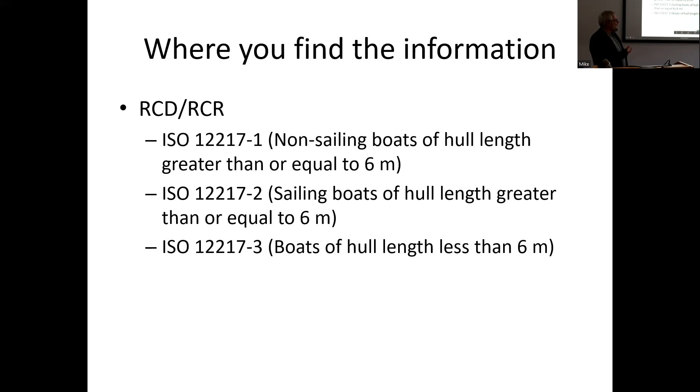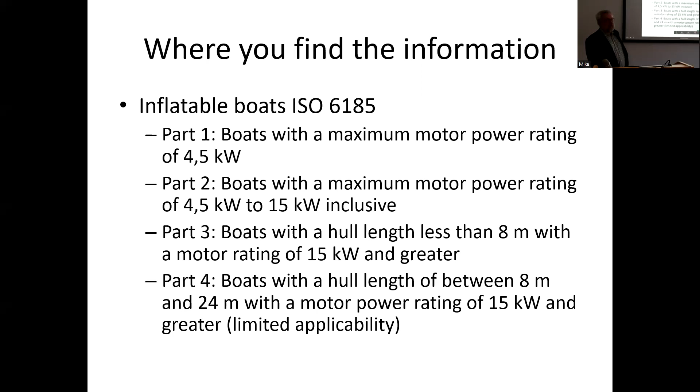So for the RCD, the Recreational Craft Directive, there are the 3 standards that are mostly where you'll find it, although for the small inflatable boats, by and large, it tends to be in ISO 6185 for them, but that is not something I'm going to look into at all. But that is one area where a certain amount of stability work has been done.

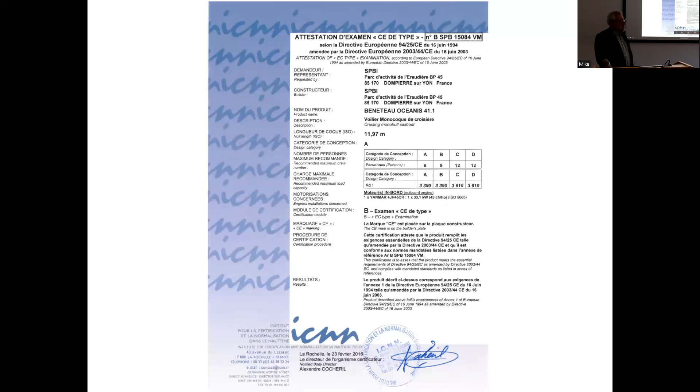So that's a typical sort of form for a biggish, well, Beneteau. And from that, you will see that it is Cat A for 8, Cat B for 9, and then 12 for the others, persons on board. But the bit that actually says it is that line there, where the stability information has been applied to the standard of 12217-2. So that is about all you're likely to find for a vessel like that, but it has passed that standard.

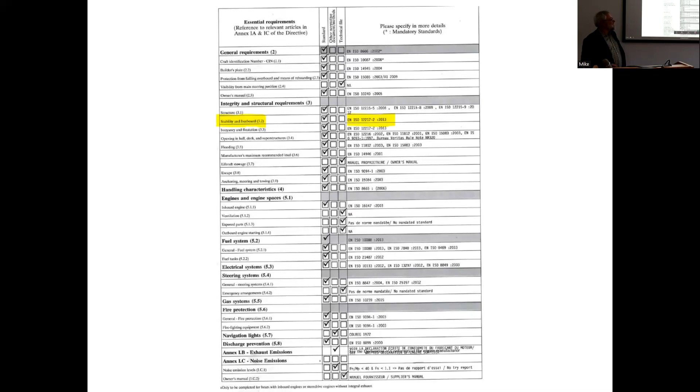For a small boat to get a Cat A or B rating is hard, because the biggest factor there is the length of the boat. The base is twice the waterline length plus the hull length divided by 3. So essentially the length of the boat is the big factor, and that gives you the STIX number. The factor then is all of these other things. It is getting one number from a number of other factors, like the dynamic stability factor. It is still using static numbers, static stability.

All of these other things, the inversion recovery factor to do with angle of vanishing stability, and the knockdown recovery factor, influence the number, but by far the biggest thing is the length.

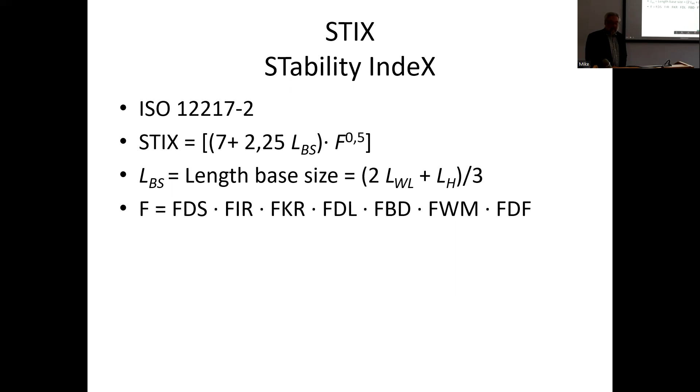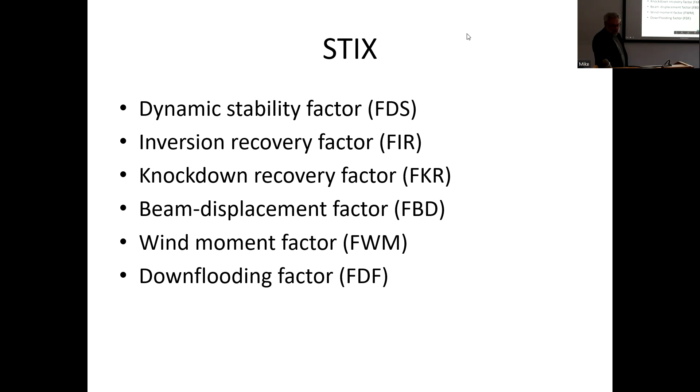But the other one, STOPS. Can I move this? Yeah, just put it out of the way. There we go.

STIX is that. STOPS was the RYA scheme before that, the Sail Training Operational scheme. Nobody ever knows what these acronyms are supposed to mean, and it's rather got lost in the mists of time. But this was used by the RYA and the Royal Ocean Racing Club to give a screening number for sailing boats. Again, it works on a very similar thing: a series of factors which are multiplied together to produce one number.

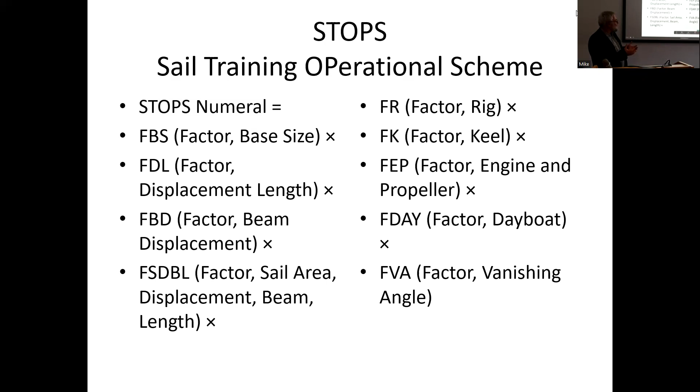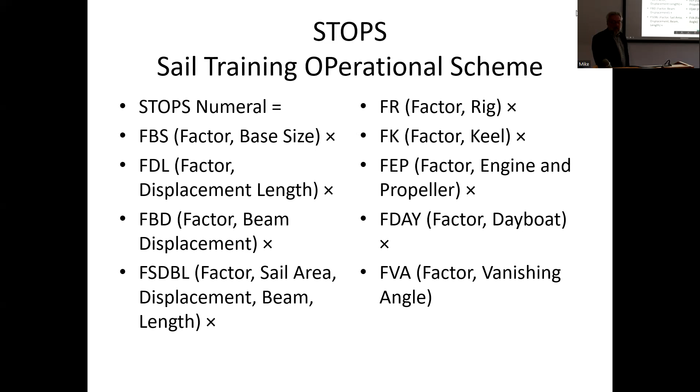It's not bad, but again, the overriding thing in whether something is considered a stable or an unstable sailing boat is the size. The other factors to do with beam and displacement all have an effect, but the overwhelming thing for this sort of scheme will be the length of the boat that determines how stable or otherwise it is considered.

One thing I would say for STOPS is it is rather a black box solution. You plug in the numbers and the answer comes out at the bottom. Make sure that you are measuring the correct things if you do have to do a STOPS calculation, and look at all the information to determine what is required. As far as the actual calculations are concerned, to understand precisely what's going on takes a bit of effort to dig into, so I wouldn't worry.

But again, with any of these things, it is about measuring the right things if you are required to do something like a STOPS calculation for coding purposes. There are places to find this information, but the one thing is the drafts are taken at an eighth of the total beam away from the center line.

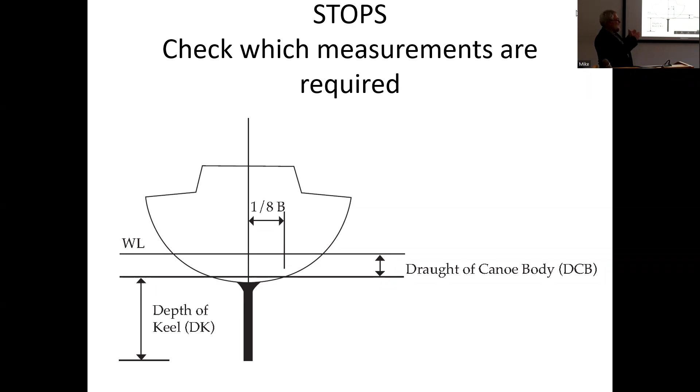Well, MGN 280 and other coding things, I just put together the basic things here. This is more to say that really this is completely opaque. When you look at it just as words, it doesn't make a lot of sense. The area under the righting lever curve should not be less than 0.055 meter radians up to 30 degrees angle of heel, and not less than 0.09 meter radians up to 40 degrees angle of heel, or the angle of downflooding if that angle is less.

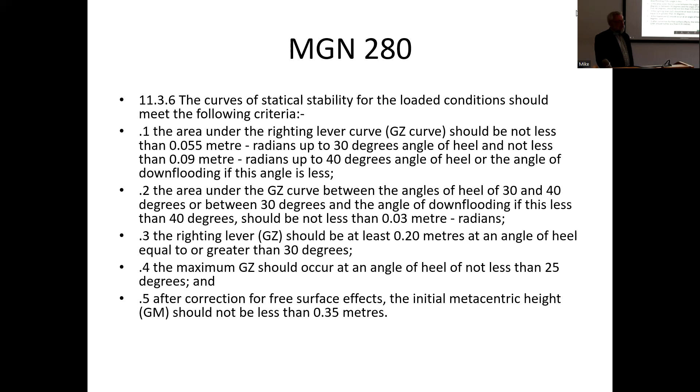That as a phrase doesn't mean a lot, but I hope, as we go along, to explain a bit more about what these various things are and what they mean in practical terms for the boat you're looking at. Again, these things are all written there in 11.3.6, and they don't of themselves mean a great deal.

And then the multi-hull form is even worse, and it has definitely been taken from a different place. The terms they use are slightly different. The nomenclature they use is slightly different from the paragraph that's above. But that is just to say it is there in there, and I'll try and go on and explain what these things mean if that's any help.

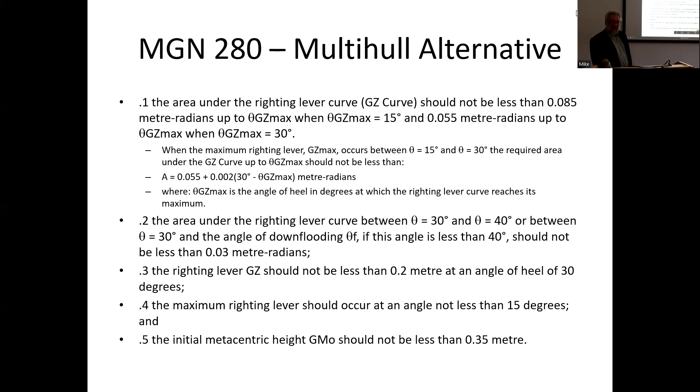Right. Okay. So from the naval architecture point of view, this is your standard hull, your standard boat. It's basically a cargo ship, which is drawn with a flat bottom, turn of bilge, and parallel sides. And the various points you look at on the center line are K, which is the keel, B, which is the center of buoyancy, then G, which is the center of gravity, and M, which is the metacenter, which I will come on to shortly. But those are the 4 points in a vertical, and when the boat's at rest, as statics, no external forces on it, they will all be in a straight line. They will all be vertically above one another.

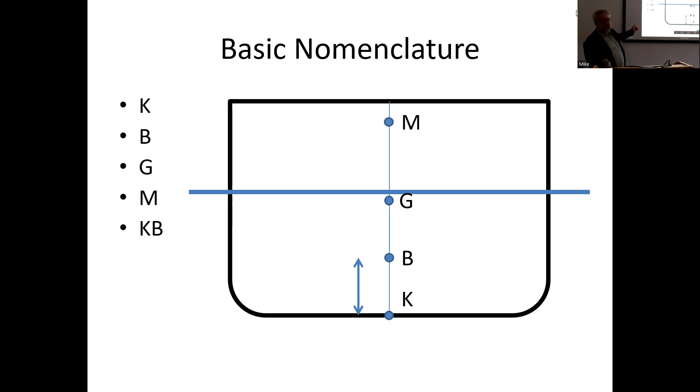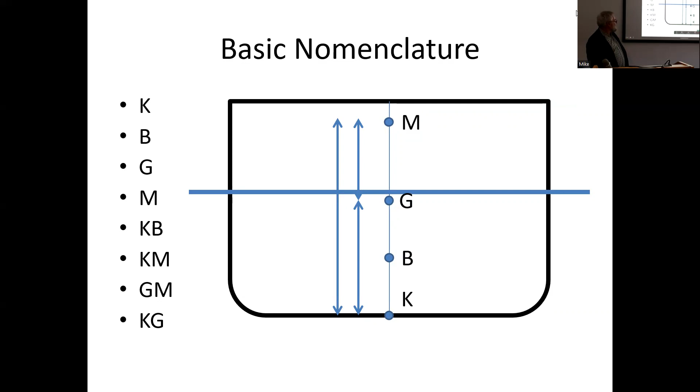And then you might have come across terms like KB, KM, GM and KG. And so for this, BM is the metacentric radius, which is the distance between the center of buoyancy and the metacenter. That is something which is used in terms of calculations, especially with the inclining experiment and other things like that. That is a useful figure. The GM is the metacentric height, the initial metacentric height, which is one of the requirements listed in that MGN 280. It is your initial metacentric height.

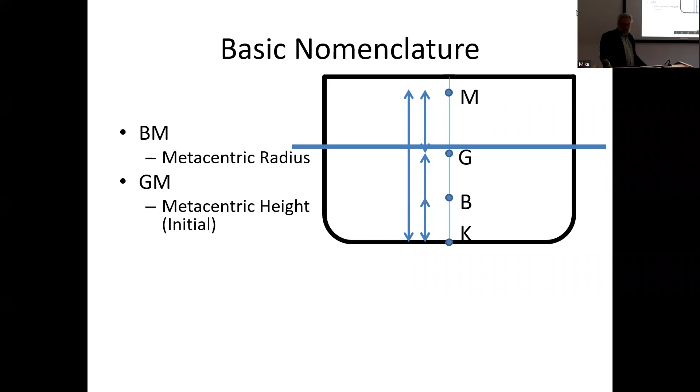And the KG is the vertical center of gravity, how high the center of gravity is above the keel. And then KB, the vertical center of buoyancy, how far the center of buoyancy is above the keel. And it is those four that are the sort of useful positions to know, the useful terminology to use within these things. And the other thing to point out is if you have the two letters together, it just means the distance between those 2 points. And that is the thing to remember.

So when talking about stability, if it is GM, it is the distance from G, the center of gravity, to M, the metacenter. If it is KG, then that is the vertical center of gravity. That is the distance from the keel, which is normally your reference point. Sometimes it isn't, but it is usually your reference point. And in general, that means you've just got positive numbers always for that. They're always going upwards. So

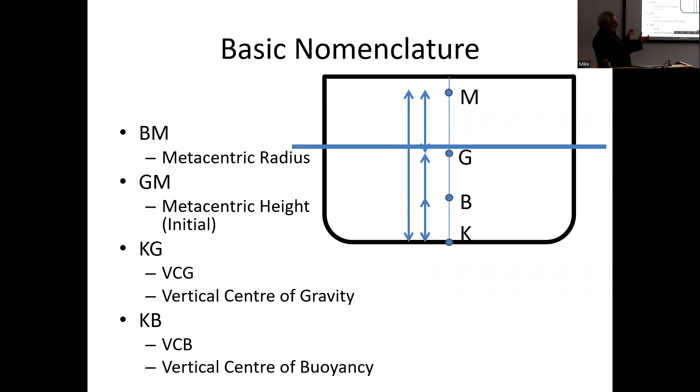from this static, stable ship with no external forces on it, we then go along and we put some external force on the ship. We heel it over. What happens here is, for the sake of simplicity, we always assume that the center of gravity is still in the same place. For various reasons it can move, but in this case, we assume it isn't. And what we can say is that we now have a new center of buoyancy. The center of buoyancy is now in a different place from where it was with the static hull.

And we can draw a line straight up from that new center of buoyancy. And where that crosses the center line, we call the metacenter. That is effectively where the hull rotates around. It works on small angles, especially with slab-sided vessels. As soon as you start to get more shape, that metacenter moves around. But for the sake of simplicity, we assume a parallel-sided ship, and that metacenter is always then above the new center of buoyancy.

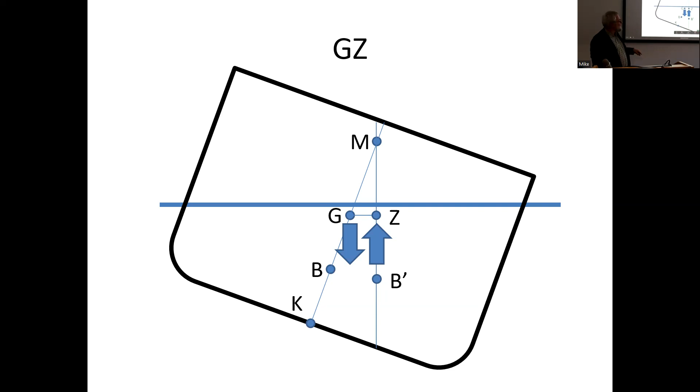In most cases, you just deal with the lever and don't worry about the moment. The other point that you will find is KN sometimes. In some stability booklets, you will come across a table of KNs. And KN is useful because from KN and KG, you can work out GZ.

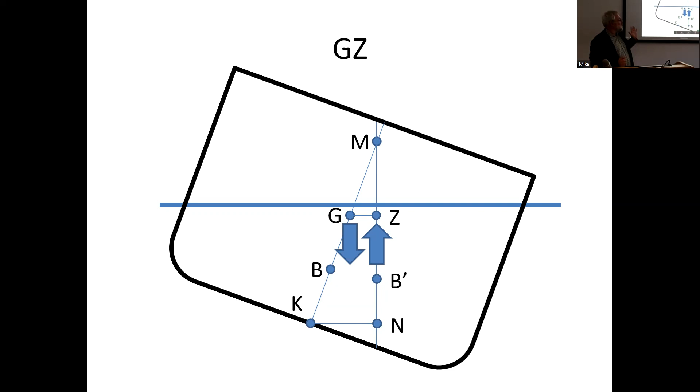That is, if you're having to produce a new set of conditions from a stability book without a model attached to it, you just have the stability book data. And having a table of KNs is extremely useful. It makes your life a lot easier, especially with a spreadsheet. To be able to go from KNs to GZ and produce a curve is quite straightforward then. So

essentially, I think these are things you understand, that as far as the catamaran is concerned, the reason it stays upright is because, due to the form of it, there's buoyancy over here and there's buoyancy over there, and as you start to move it, you lose buoyancy from one side and gain buoyancy from another, and the center of gravity is always in the middle.

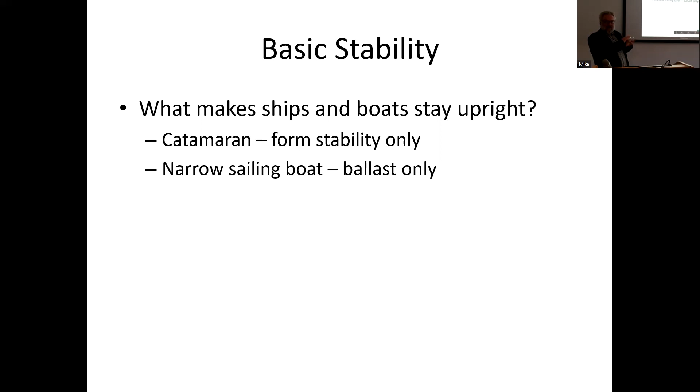For a small case of narrow sailing boats, they can be stable just because of their ballast, because their ballast is so low down in an external bulb keel that is what will keep them upright. Mostly boats are somewhere in between. There is a certain amount of form stability and a certain amount of ballast, certainly for monohull sailing boats, and it is that which will maintain the stability. So a narrow, heavily ballasted boat has different characteristics from a relatively shallow, flat, broad beam boat, which relies more on that movement of the buoyancy from side to side to keep it upright.

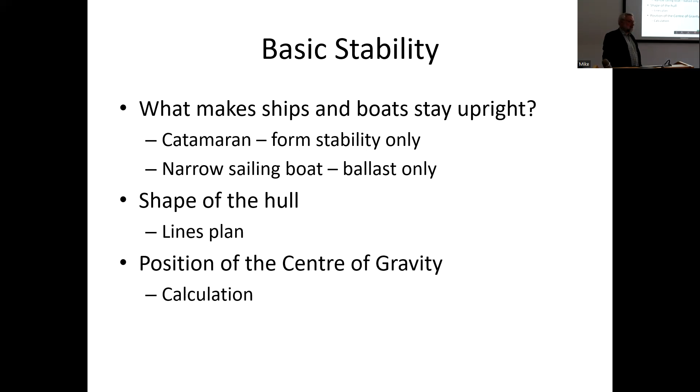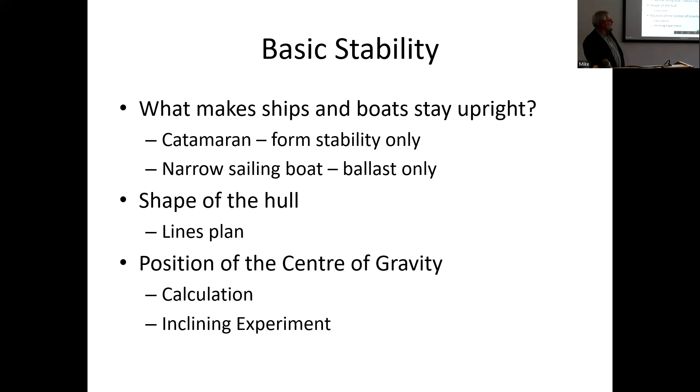And in order to work out the stability from the naval architect point of view, you need two pieces of information. You want to know the shape of the hull, which usually comes from a lines plan from design information. You can lift that from a hull, but that is a painful exercise and one to be avoided if at all possible. And otherwise, it is knowing where the center of gravity is. That can be done by calculation if you've got accurate building data, but that is not usually the case. It is more likely to be done by an inclining experiment, an inclining test, later on.

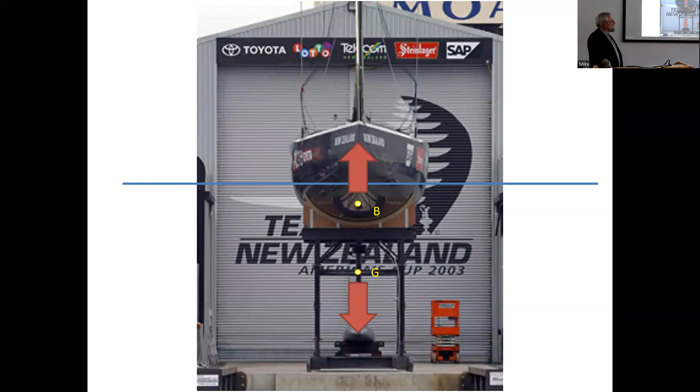So here is my example heavily ballasted boat. If we put a waterline on there, and say that the center of buoyancy is about there, and the center of gravity is somewhere there, it might be higher, might be lower, then we put buoyancy up, acting through there, and the weight of the hull is the same and acting down.

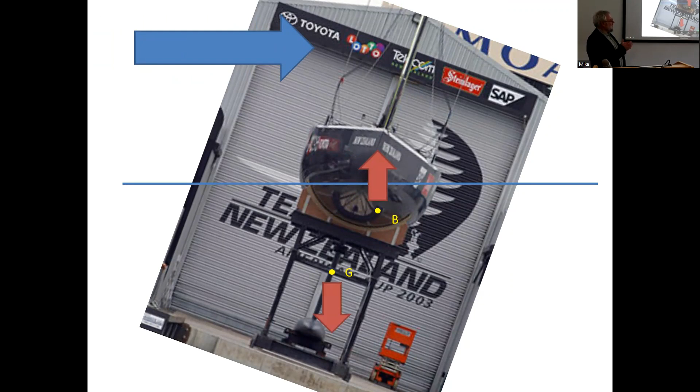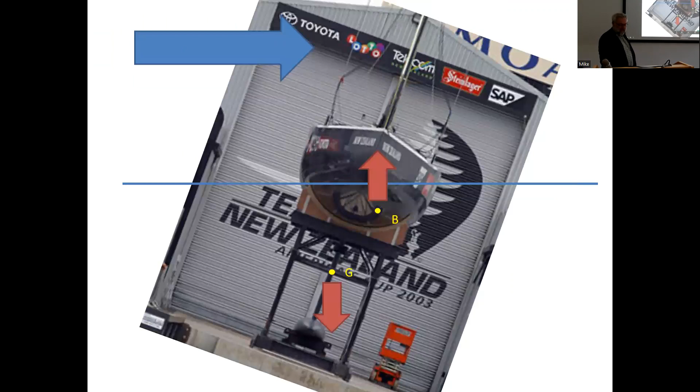So if we now heel this boat with some external force, then the center of buoyancy will have moved a little bit downhill from where it was, and the center of gravity is there. So you have buoyancy there and gravity there. And that is then your righting moment, the distance between those two lines. If you push it a bit more, then that gets bigger and bigger. So that is the sort of GZ curve you will see for a conventional, heavily ballasted boat. This is an ideal boat.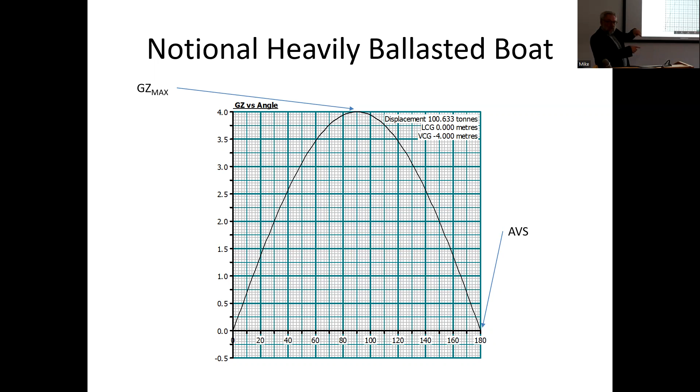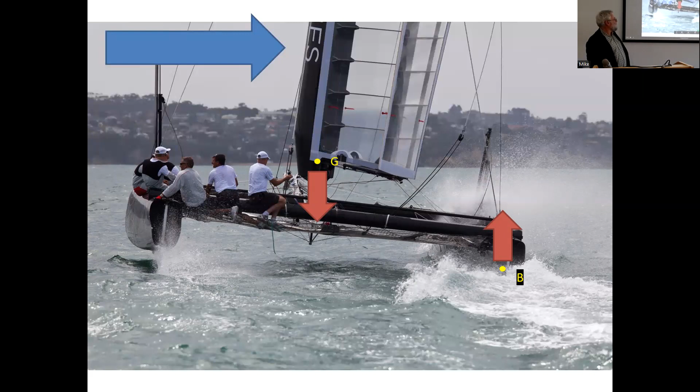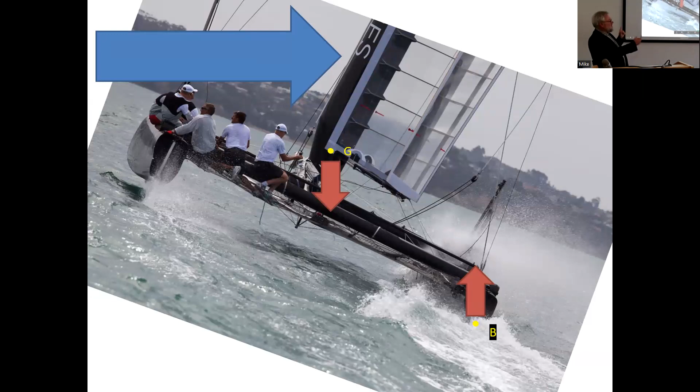In the case of the catamaran, this is about the point where you have the greatest righting moment from the external force. All of your buoyancy is in one hull, and your center of gravity is somewhere over there. So you have your buoyancy there, and your mass acting there, and weight acting there downwards. But if you heel it a bit more, then the distance between B and G, between your gravity and your center of buoyancy, decreases. And this is a GZ curve for that notional catamaran.

The things that I would point out in this are, yes, your GZ max is at a comparatively small angle. For a catamaran, that will be as soon as that one hull lifts out of the water. That is where you get your greatest righting moment.

The angle of vanishing stability in this case is about 62 degrees. Here, the vertical center of gravity is above the midpoint of the hulls, is above the hulls, which is fairly normal for a catamaran.

The other thing to point out here is that it is more stable upside down than it is the right way up, and that is something that we understand with catamarans, that if you do manage to capsize a catamaran, it takes an awful lot to get it back the right way. And the area above the line and below the line is the amount of energy required to turn it over.

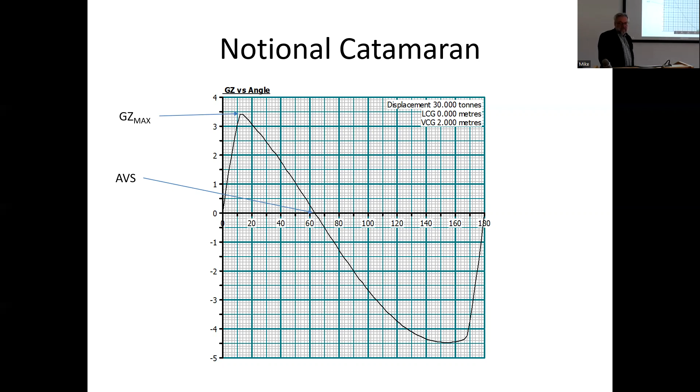And this is sort of a typical GZ curve that I found somewhere. This is more the sort of thing you will find for a normal type of boat. The odd thing here is that if you notice, it doesn't start at 0. You will need a slight amount of force to get this particular vessel to an even keel, and that is very unusual to see on a GZ curve in a stability book or elsewhere.

But it's quite common in practice, because most of the time your boats will not be sitting on an even keel, there will be an imbalance. It's an imbalance usually in weight or loading most of the time. It can be that your boat is not symmetrical. But otherwise, this is a fairly typical curve for some types of boat that you'll come across.

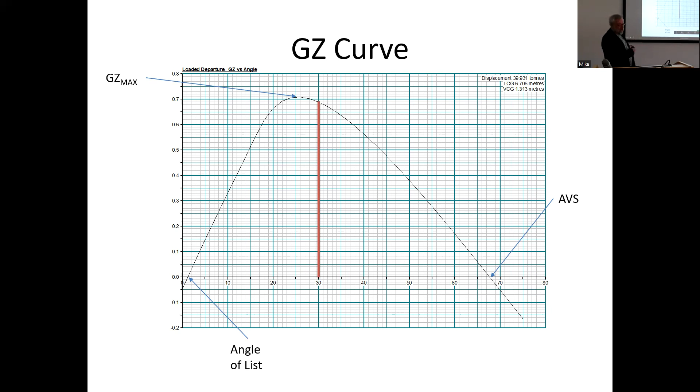And yeah, the GZ max is up there, angle of vanishing stability there around 68 degrees, and that is an angle of list rather than an angle of roll. And so for the MGN 280 requirements, it often talks about the area up to a certain figure. And the area under the curve up to 30 degrees is equivalent to the amount of energy involved in pushing the vessel over to 30 degrees.

And similarly, 40 degrees is another line, and it will often be at that point where the GZ, the righting lever, is coming down, and it is another measure of how stable the boat is, especially at larger angles of heel. Okay.

Now this is a curve of an actual boat that is out there sailing about, and it is one that is used for long distance, for sort of deep ocean voyages. It has been modelled in this case with the superstructure, and the way you can tell that generally is by the bumps in the curve, that it isn't entirely smooth, and that there are a few bumps around the 40-degree mark, which is generally deck edge immersion and so on.

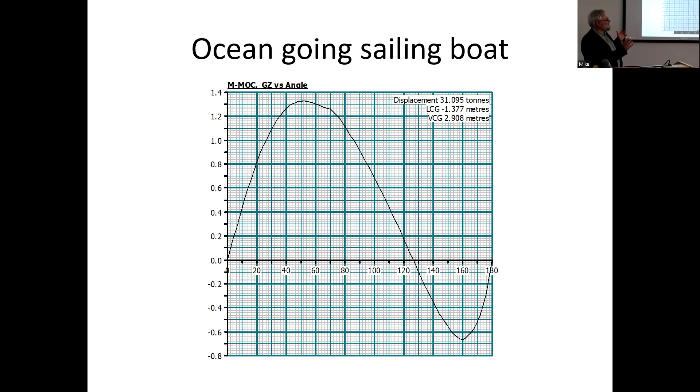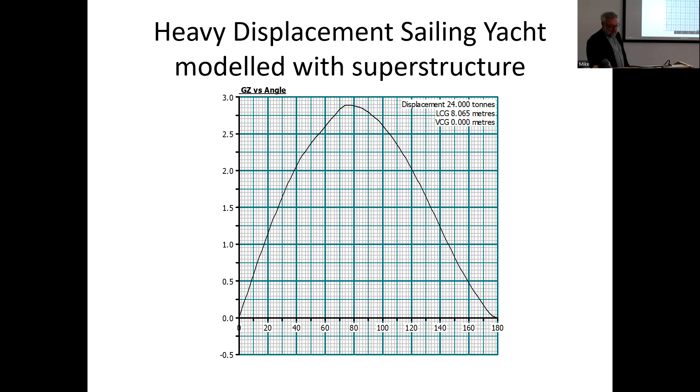So in those sort of conditions, there should be enough energy to right it from an inversion. However, it is still stable upside down. This has got a beamier shape and is different from the one here, which is more of the traditional long distance cruiser shape, narrow and so on. Sometimes the curve can surprise you when you do the numbers.

Okay. I will just go very quickly through the inclining experiment, which is the other thing that, once you've got the shape of the hull, is used to determine where the vertical center of gravity is within the boat. It's going to be a very quick dash through this. It is probably better called the inclining test, as it isn't really an experiment.

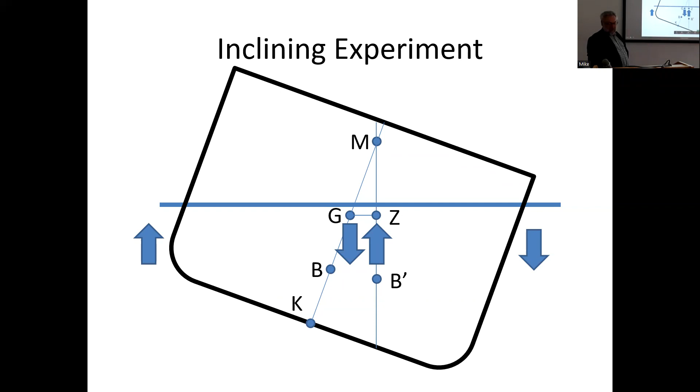What you want to do is provide a perfect couple applied to get that answer. So what you're trying to do is apply a torque to the hull, and you do that by moving weights. But you've got to think of it as a hull with the weights on it, and that is your boat, that is your system. And then by moving the weights from side to side and measuring the heel, all you're doing is applying a twist to the hull while keeping it otherwise the same.

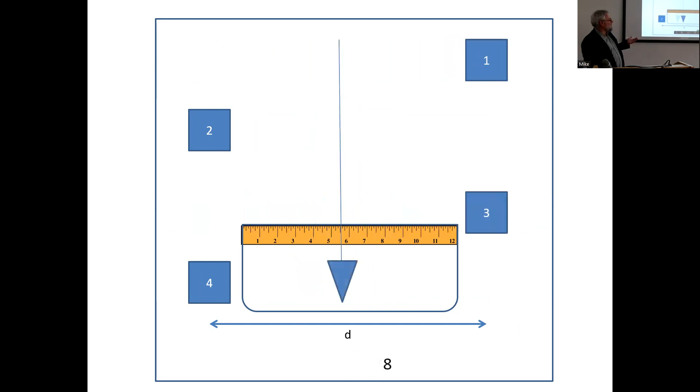And from these, you then generally get a line of points to give you a figure from which you can work out the position of the vertical center of gravity.

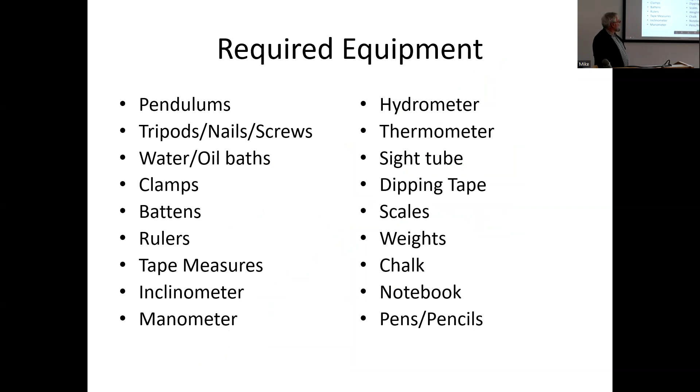I don't know how... 10, 15 minutes, okay, right. So if you do need to do it, then go into that.

Right. So I know it's been a very quick run through. Are there any questions? Anything you want me to look at in more detail, or anything I've skated over a bit rapidly there?

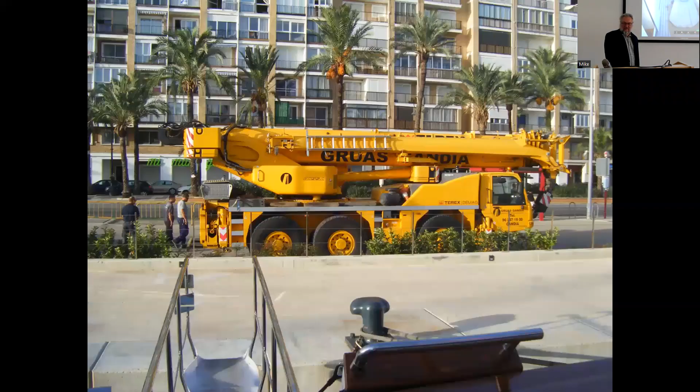The weight of a person? When you use people, I know there's been a big debate about this because we've all got bigger and larger. We have, and fatter. And the rules have changed a bit. Well, yes, the 75 kilogram person is still being used. The 82.5 is a possibility. And you can, for your calculations, use bigger people. And it is probably safe to do it, I would think.

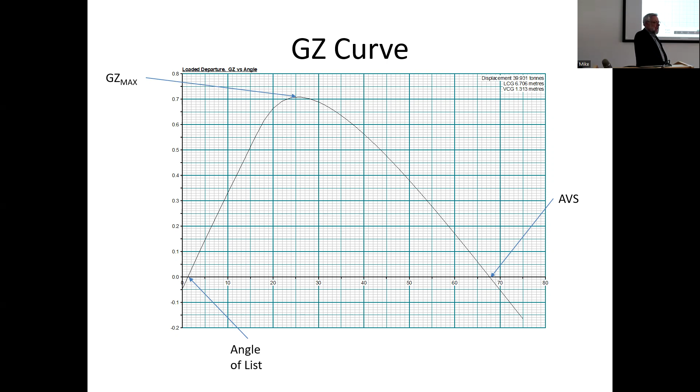When doing the incline test I've worked alongside, they hung a plumb bob on the centre line. They've also used a laser level, so they put some masking tape on the floorboard, hung it there, and then we moved 56-pound weights to various parts of the boat, marked it, and that information was put into the chart, effectively twisting the boat.

The question really was, if you had any difference between, say, the port side midships and the starboard side midships, measured the same distance back from the stem, and you had a difference in readings, would that indicate that there's a difference in stability on different tacks, or is the hull unsymmetrical, or could it just be that there's some fuel tank in one side and buoyancy?

There can be various reasons why. In general, I find that by the time you put the things in, the line is pretty good. I haven't found that having any sort of a list is difficult to deal with, because you often either trim it out with the weights before you start, or you generally just ignore it because you're dealing with the difference between the two marks on your thing, and as long as they come back to the same point in the middle, you generally don't worry about it not being exactly square, often because you're not necessarily sure which parts of the boat are horizontal to start off with, or which part of the ship.